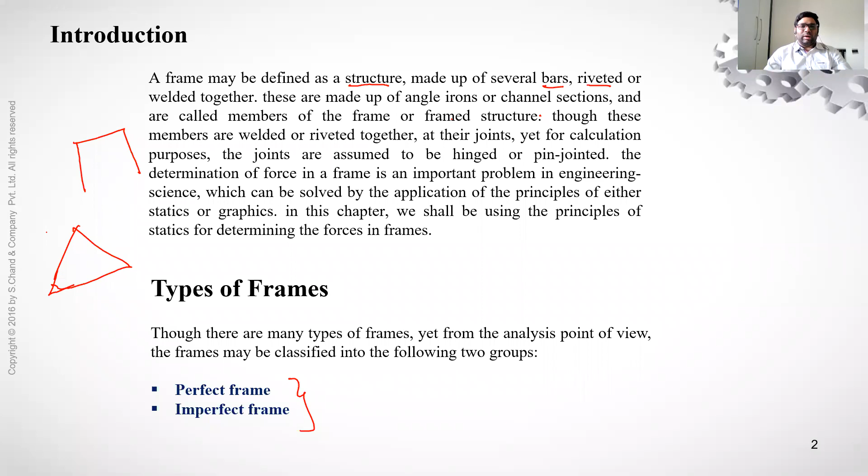So what are the different types of frames? Perfect frame and imperfect frame. So what is a perfect frame? A simple perfect frame is just a triangle. So a triangle is simply considered to be a perfect frame, and it will have three members and three joints.

So what is the understanding we get? Whenever the triangle is loaded by some load x, y, z, the shape will not be distorted or the shape will not change its position. Therefore, for a three-jointed frame, there should be three members to prevent any sort of distortion. That's right? Now, when you are increasing a joint, this is also what I said.

So if you want to add one more joint here, then what will happen? See, for example, this is the joint. If this joint 4 has to be created, we need at least two members. So that means a joint should have two members to make it a proper frame. Okay, that's why in the last point you see that for every additional joint to a triangular frame, two members are required.

And the number of members, so you might get a doubt. When you are traveling on a road, you will come across a truss, you will come across a perfect frame. A frame is also called a pin jointed plane frame. What is it called? Pin jointed frame. I'm writing it here. Perfect frame. Under this we have truss or

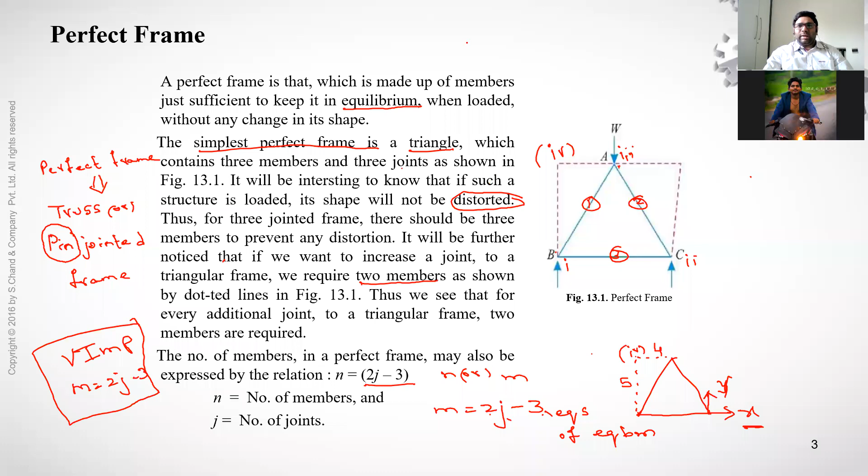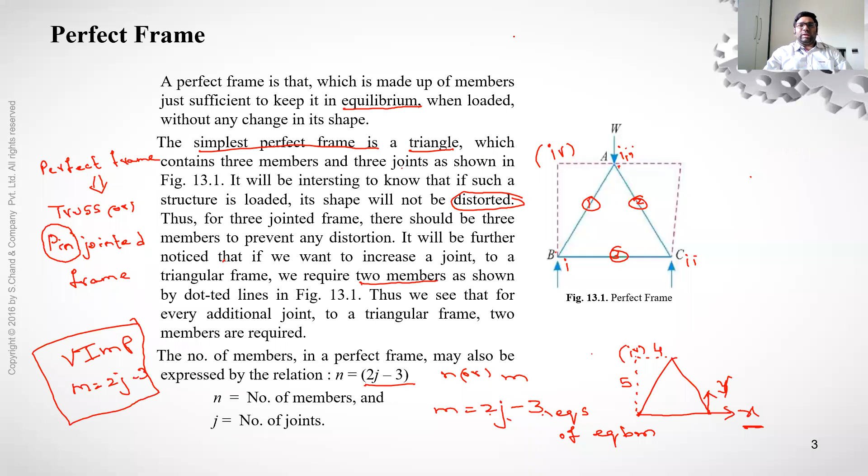At the top portion, when there is a joint, take any joint, it can move up or it can move horizontally. Because it can move up and horizontally, it will lead to deformation in the x direction as well as the y direction. That is why it is 2j minus 3. Okay, clear. Now we have the next topic, called the imperfect frame.

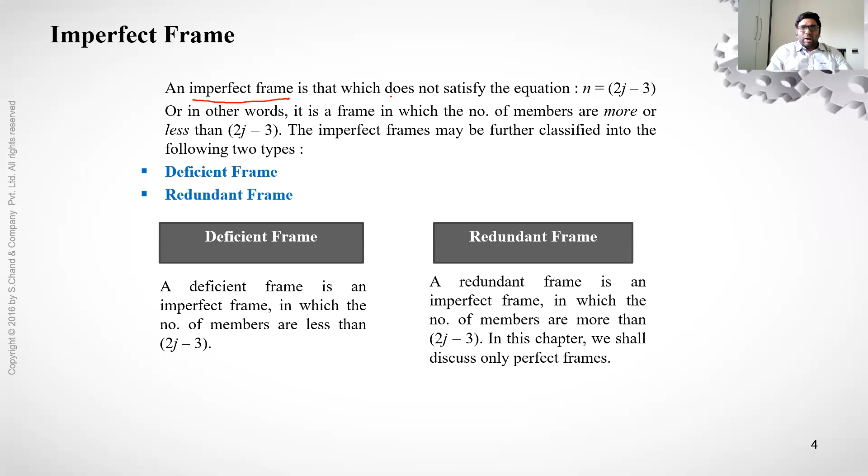So how do we define it? An imperfect frame is one that does not satisfy m, or n, is equal to 2j minus 3. In other words, this is the definition you need to write, an important definition: it is a frame in which the number of members is more than or less than 2j minus 3.

So for example, you have a triangle. Let me take the example of a triangle here. Okay, so how many joints are there? j is equal to 3, isn't it? Joint 1, joint 2 and joint 3. Now what is the formula here? M is equal to 2j minus 3, that is 2 into 3 minus 3, which is equal to 3, isn't it? A triangle will have 3 members with 3 joints. Okay.

Now if the number of members are more than or less than 2j minus 3, then it is called an imperfect frame, isn't it? So always your m should match with 2j minus 3. If it is greater, then it is called an imperfect frame. Now this imperfect frame can also be further classified into two categories. One is deficient frame, one is redundant frame. Redundant, so that word you need to remember. So whenever you talk about redundant, it means it's not required.

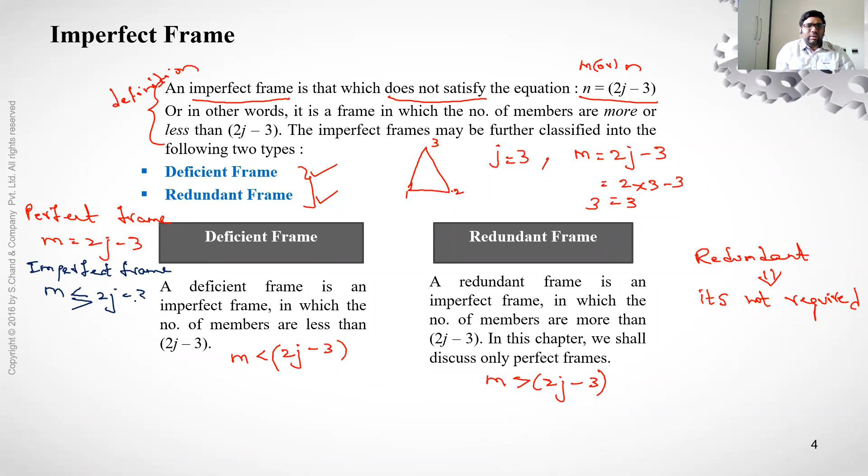Okay, and under this we have two more categories. So what are those two categories? The deficient frame and the redundant frame. So deficient, here it says m less than 2j minus 3, and redundant will be m greater than 2j minus 3. So these concepts are very important from your exam point of view also. Very important concepts.

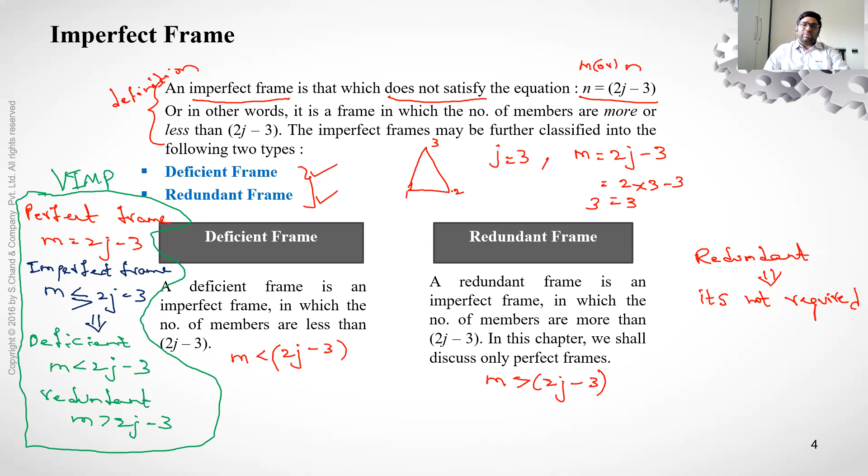So depending upon whether the frame is perfect, deficient or redundant, we will carry out the analysis. So these definitions are very important. Now, in a pin jointed frame, how do we calculate the stresses? So when you're talking about the calculation of the stresses, what is important there? In every member, we have a tensile stress or a compressive stress. Of course, bending will not be there here as of now. So we are talking about pin joint, right?

So I'm again repeating here. A pin will look like this. This is a pin, and for this M is equal to 0. So for any pin, moment will be equal to 0. Okay, now let us see. Somebody will ask you, how do you define a stress? The answer should not be stress is equal to load divided by area. No, definitely not. You should give a proper definition of stress.

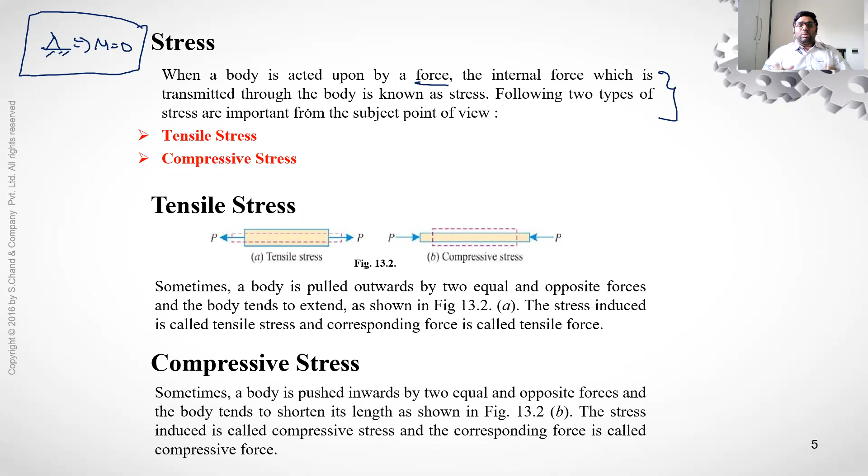When a body is acted upon by a force, the internal force which is transmitted through the body is known as stress. If an individual is able to answer like this, it shows a very good overall understanding. So what is a stress? It's an internal force which is transmitted through the body, and that's how we need to define it. And the stresses can be classified as tensile stresses and compressive stresses. Sometimes these tensile and compressive stresses can act on opposite sides.

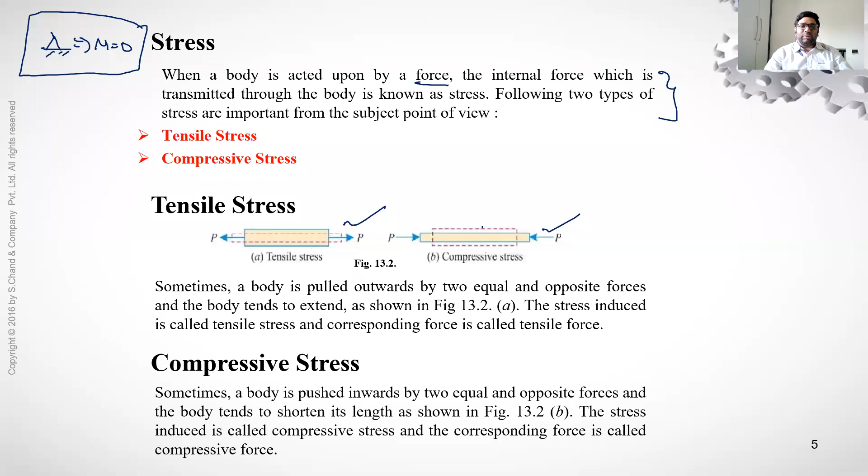Now see here, this is being stretched and this is being compressed. Always the compressive stress will try to reduce the length of the body, and the tensile stress will try to elongate or extend the body. So the entire truss or perfect frame will be subjected to either compressive stresses or tensile stresses. So what do we need to do here? We need to analyze the truss or perfect frame subjected to horizontal load, vertical load, and inclined load.

So what do you mean by analysis? It is to calculate the forces in all the members of the frame. The forces in all the members of the frame, that is what we need to calculate. So now, considering that specific scenario, what are the assumptions before trying to take the problem further?

Now, let us try to see what are the assumptions for the calculation of forces in the members of a truss or a perfect frame. So the first one is that all the members are pin jointed. So there won't be any fixed, there won't be any rigid, and there won't be any roller also. Of course, roller to some extent at one end as a support, but all the joints are pin jointed.

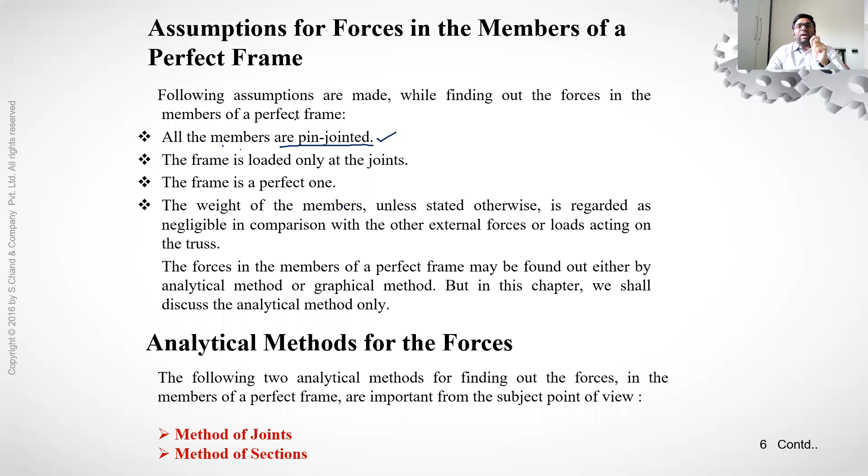And another important point is the frame is loaded only at the joint. Now, this is a very interesting criteria here. If you can see me here, I'm just trying to hold a triangular shaped thing for a better explanation to all of you. So I'm holding a kind of a pen in my video. You can see that here. So this is a kind of support that we have, or the condition of a truss.

See, the load actually will act only at the junction of a member. So what does that mean? When we are talking about the joint, each joint is subjected to load. So why is it mentioned as only the joint? Why not on the member? I'll try to explain that.

So when you take a perfect frame, especially the truss kind of a member, how does this force act? Will a vehicle pass on a truss? No, definitely not. A vehicle will pass on a platform. So whenever we are talking about a vehicle moving on a bridge or an industrial shed constructed with the help of a truss, the joint of a truss is subjected to environmental related load, the atmospheric load, and all the forces.

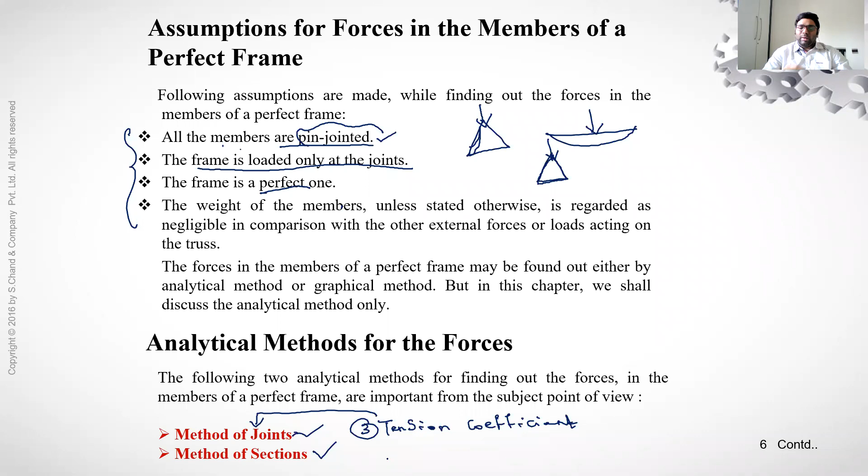And in order to analyze the pin jointed frame, we have got three methods: method of joints, method of sections, and tension coefficient method. And tension coefficient method is similar to method of joints. Okay, so this is how we take a frame and analyze it. Now let me explain to you in brief the two methods, that is method of joints as well as method of sections. It's a very simple method. We need not worry. It's all about engineering mechanics, and that too only one topic, that is the equilibrium condition. We already know this equilibrium condition.

So this entire concept of method of joints and method of sections will work purely based on equilibrium conditions. So what are the equilibrium conditions? ΣFx = 0, ΣFy = 0, ΣMz = 0. So there can be a moment acting at the joint which would be equal to 0, correct? Pin jointed frame, which means that at a joint the moment will be equal to 0. So we can use the third condition also.

Now all of you please see carefully. Definitely you'll be getting a problem in the mid and in the external exam on method of joints. So in this method, each and every joint is treated as a free body in equilibrium. What is that? Each and every joint is considered as a free body in equilibrium. All the joints are in equilibrium. You can see that this is a triangular truss, and at joint 1, you can see here we have resolved into two components. What is happening here?

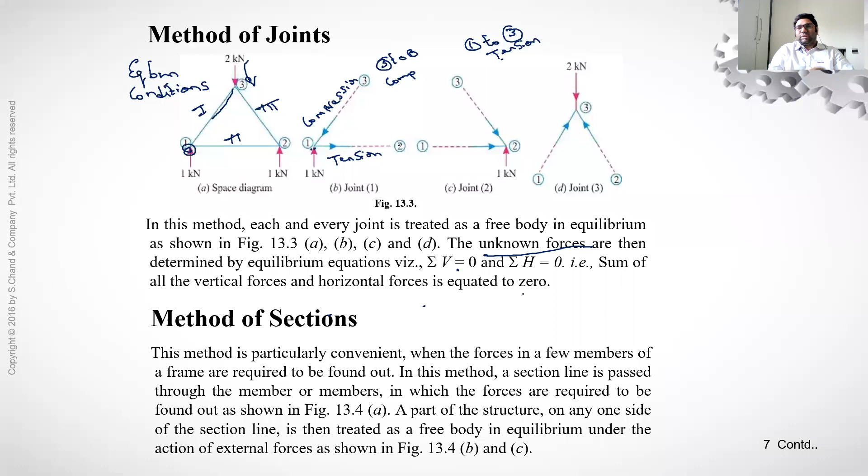Now the unknown forces are determined. So we don't know the force in this member. So we have this member as 1, this is member 2, and this is member 3. So as of now, we don't know how much force is acting upon these members. So these are called the unknown forces. And how are they determined? They are determined by sigma V = 0, sigma H = 0. So the sum of all the vertical forces and horizontal forces is equated to 0, and then we will get the clear picture of forces in all the members of a truss.

Okay, so this is how we try to solve the problem for method of joints. Mostly we will solve problems in the coming classes, and then you will get a very clear understanding of how to analyze a perfect frame using method of joints.

And the next one is method of sections. This is convenient when the forces in a few members of a frame are required to be found out. I'll give an example. You see here, this is one triangle, and I am putting one more triangle, and one more triangle. So how many members are there? 1, 2, 3, 4, 5, 6, 7 members are there. So if I want to calculate forces in all the members, then I will use method of joints. Forces in all members.

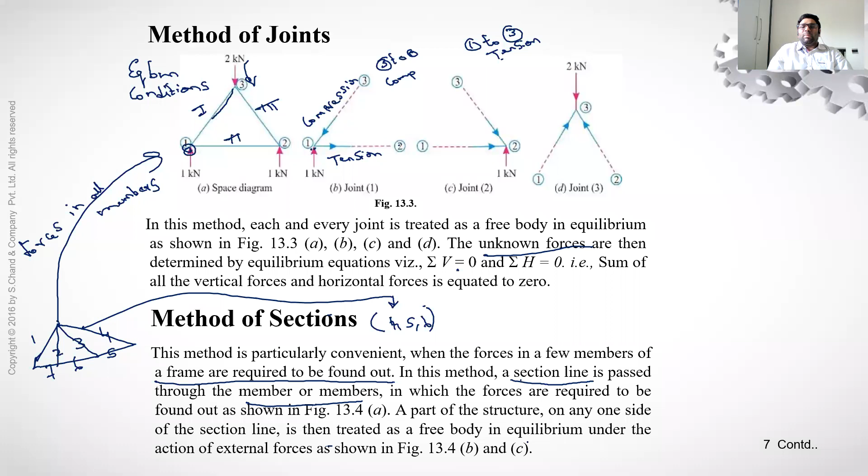But when it comes to the method of sections, if I want to calculate forces only in members 4, 5 and 6 alone, then method of sections is very easy. So in this method, a section line is passed through the member in which forces are to be calculated. And a part of the structure on any side of the section line is treated as a free body in equilibrium under action of external forces.

I'll show it in the image. You can see here, for example, if I wanted to calculate the forces in the member BC, I am cutting the section here. Anywhere I can cut. So when I cut the section, you can see this is one part, the left part, and this is the right part. So what do we need to do? Take the left part, apply equilibrium conditions sigma Fh, sigma Fv, and sigma M, and take the right part, and again using the sigma M concept in the right part, we will get the forces.

So theoretically, it might be looking somewhat challenging initially, but when we enter into the problem, that's where you will get the clarity on how we try to resolve it. Okay, so that is how we generally analyze a perfect frame for getting the forces of the members using method of joints and method of sections.

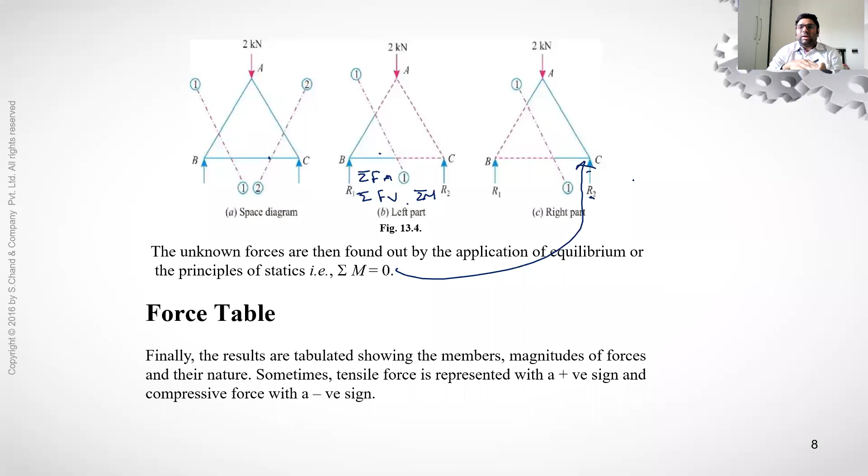Once again, I'm repeating, in method of joints, start with one joint and finish off all the joints by calculating the forces in the members using equations of equilibrium. In the method of sections, we will try to consider the portion associated with the member where we need to calculate the force. So that portion will be cut, and the left part and the right part will be under equilibrium, and accordingly we will take that. Okay, so depending upon this specific behavior, we will get the forces in all the members of the truss.

Okay, to be precise, anyways, I'll be solving it on the board from next class. But as an example for you to understand, I have put one truss in front of you to get the clarity of how we are using method of joints. Okay, so tomorrow's class I'll be explaining it in detail.